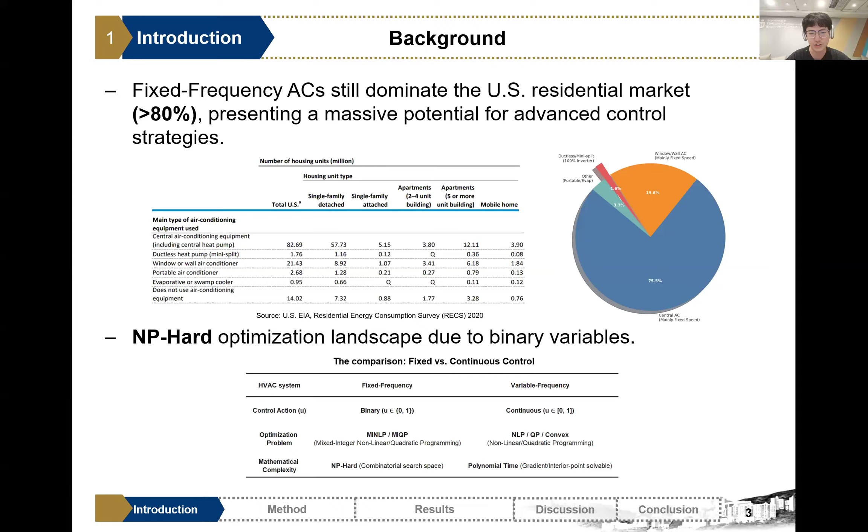But it leads to a problem because if you want to control the fixed frequency AC, that means the control signal must be binary on-off control. So that leads to an NP-hard optimization problem. This leads to the first gap.

Even though mixed integer MPC can be used to improve performance of fixed frequency AC, MIMPC requires high performance equipment to solve complex mixed integer problems. And solving MIP is often computationally prohibitive for low-cost embedded hardware.

So what we want to do is to utilize approximate MPC, using a neural network to imitate the action of the teacher MIMPC without solving MIP.

Even though approximate MPC is good, it still requires some non-negligible memory to store the full model. Most MCUs deployed on residential fixed frequency AC are very resource limited, especially compared with high performance equipment like cloud servers.

So if you want to deploy the AMPC on the MCU, you need hardware-aware algorithms to shrink the size of the model and accelerate the operation speed simultaneously. In this research, we use post-training quantization, quantization-aware training, and pruning to do this.

After model compression, the model's accuracy may be compromised. So in this research, we will explore different compression ratios to identify one that both reduces model size and ensures good control performance. Based on that, here is the overall workflow.

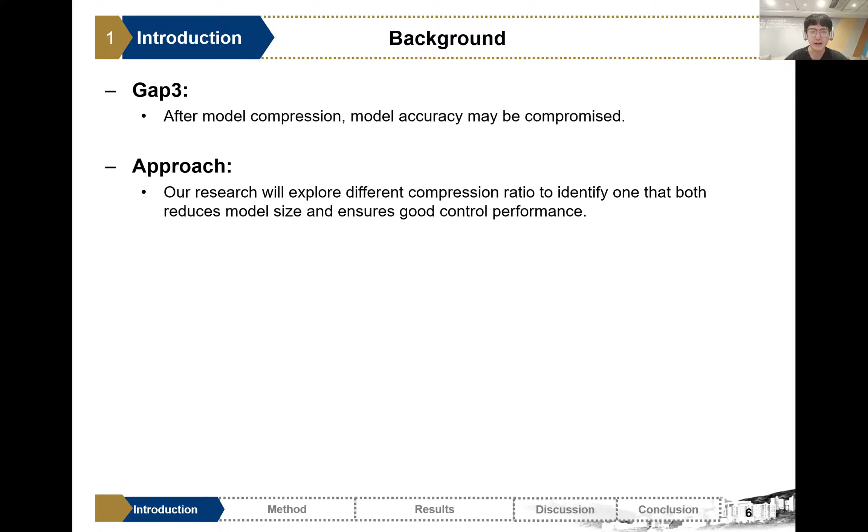At first, we developed a reference MPC, which is a fine-tuned mixed integer MPC. Then we use this MPC to generate some training data set. Then we use this data set to develop some MLPs. Then we use model compression algorithms to compress the several MLPs. Then we find the best one which reaches the best trade-off between control performance and model size, and then deploy it on the hardware.

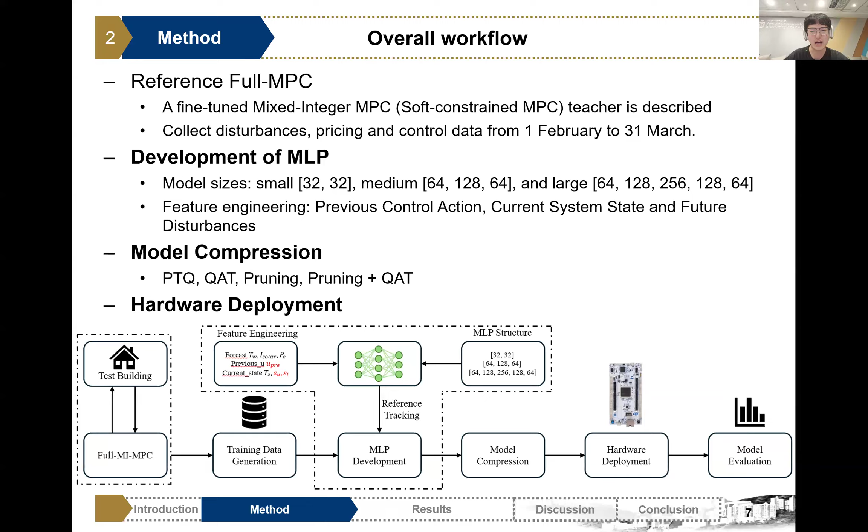So let's start with the system setup and test bed. In this research, I use BOPTEST. Specifically, I use the test case called BOPTEST hydronic heat pump, and I test the teacher MPC and AMPC under the peak heat day and typical heat day.

For the teacher MPC, the thermodynamic model I use is the 1R1C model, and because our target is to control the fixed frequency AC, we need to know the maximum heat pump electrical power and maximum thermal power. For this test case, the maximum power is 3.4 kilowatts, and the thermal power is 10.6 kilowatts.

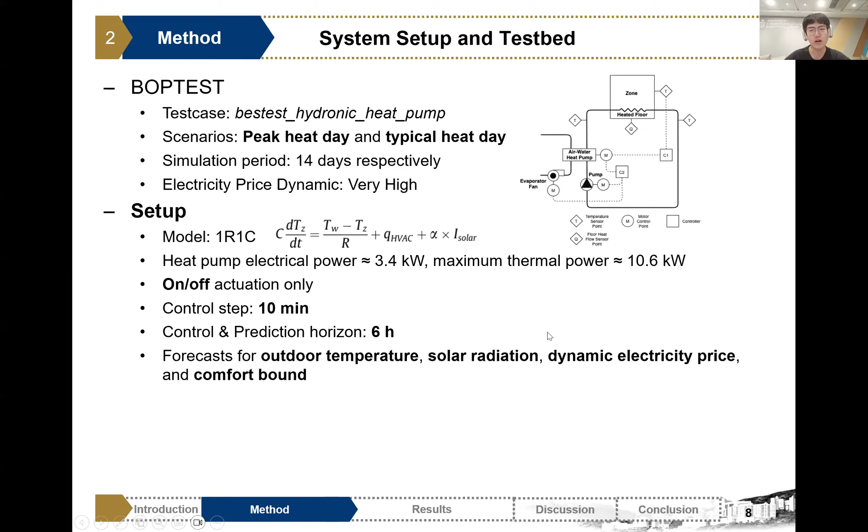Because it is fixed frequency AC, there's only on-off actuation for both AMPC and teacher MPC. The control step is set to 10 minutes, and the control and prediction horizon is set to 6 hours. All of the forecasts here will be sent to both MPCs.

So let me briefly introduce the full MPC. Here we use a soft-constrained MPC. You need to pay attention to the objective function. It includes 3 parts: energy cost, thermal discomfort, and times of switching on off. The first 2 terms is easy to understand, but why we set the third term?

Because the high frequency on-off behavior may be harmful to the equipment and occupant comfort. And then these are the constraints.

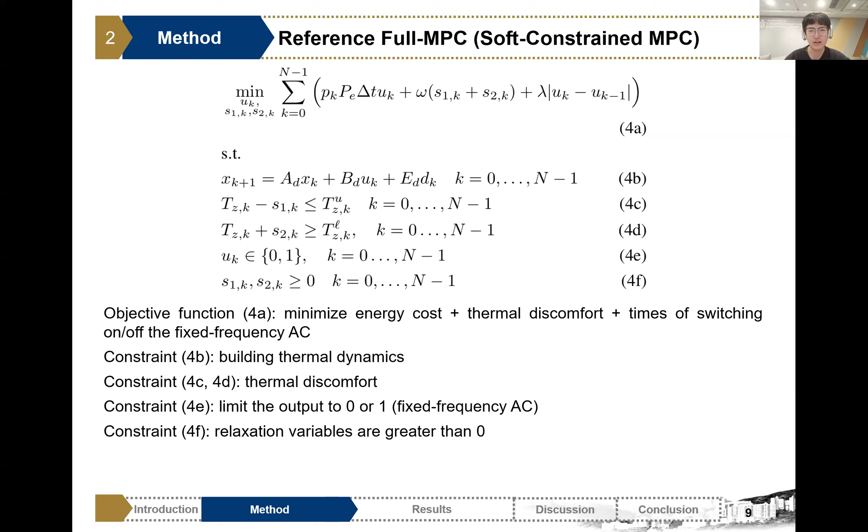So we use this MPC to generate a training data set and use the training data set to train these 3 sizes of MLP. The first small one includes 2 layers, the medium includes 3 layers, and the larger one includes 5 layers. And for the hidden layer, we use ReLU, and we use sigmoid for the output layer.

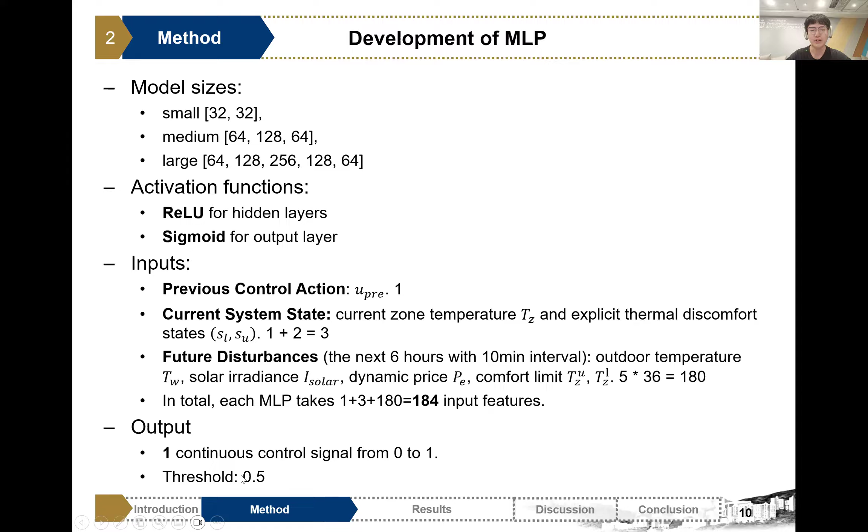Here, all of the input features can be divided into 3 parts. First, the previous control action. The second part, current system state, and the third part, future disturbances. So altogether, 184 features will be input to each MLP. All of the features will be processed by the MLP and then get 1 continuous control signal from 0 to 1. This continuous control signal will be converted by a threshold into a binary control signal.

And then before I introduce why the compression algorithm is very useful and efficient, let me briefly introduce the data type.

In machine learning models, almost all of the weights and bias are stored in FP32. That means 4 bytes. If you want to store 1 number, 4 bytes are required. So if we can convert the FP32 number into an int8 number, the storage size will decrease a lot, because only 1 byte is required to store 1 int8 number. So that's how the quantization algorithm works.

So at first, we use the simplest quantization algorithm, which is called post-training quantization, or PTQ. Here, the diagram shows how post-training quantization works. It's the simplest one, but it just simply maps the FP32 number into the low precision number. So you can imagine the control performance will degrade a lot.

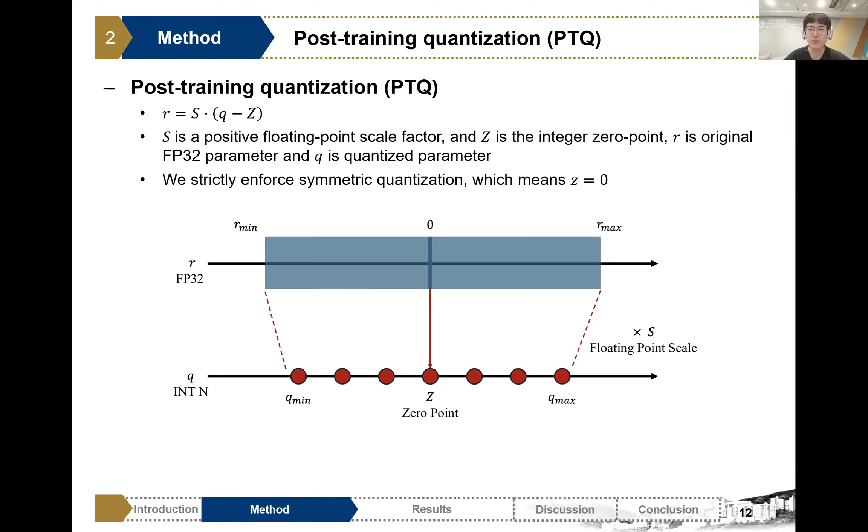So to address that, we also tried quantization aware training, or QAT. This algorithm lets the MLP adapt to the quantization noise during an additional training process. So the control performance will improve a lot compared to post-training quantization. But you can see here there is an additional, complex training process.

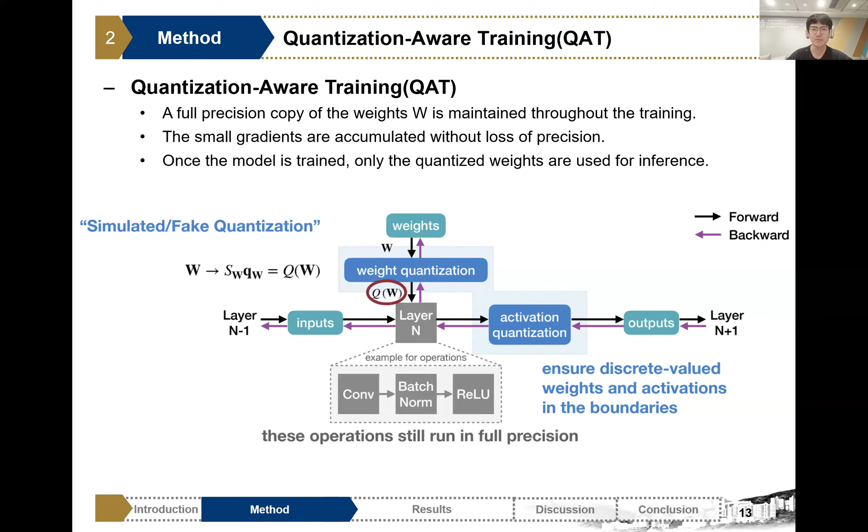If you want to use the pruning algorithm, the pruning granularity, criteria, and ratio need to be set. First, we use neuron level pruning, which means you need to remove the neuron and all input and output weights connected to it. The criteria in this research: we assume weights with larger absolute values are more important than other weights. Third, the pruning ratio, which means the proportion of neurons that are eliminated.

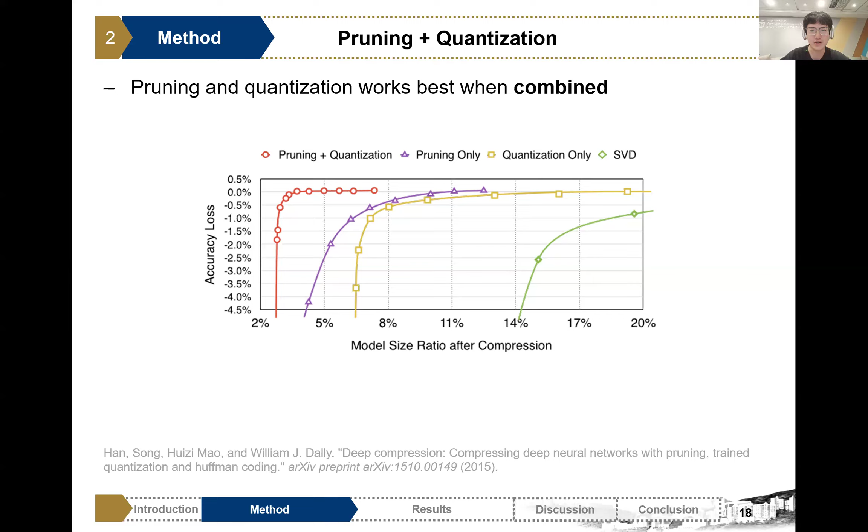Because in the research we want to find which compression ratio shows the best trade-off, we tested it from 10% to 90%. After the pruning, additional fine-tuning is required to improve the performance of the model. Some research finds that if you combine pruning with quantization, the model's performance will be better. So here we also combine pruning with quantization.

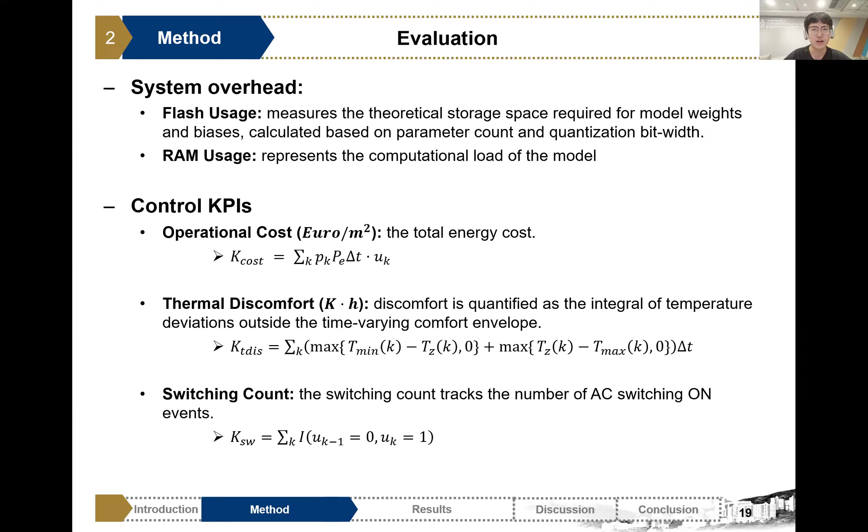So for the system, if you want to push one control step, first the BOPTEST will send the forecast and current state through the serial port to the STM32 controller. Then the AMPC deployed on this controller will process the information, get one control signal, and send it back to the PC. So you can imagine the STM32 is just like a real-world thermostat, and the BOPTEST pretends to be a virtual AC.

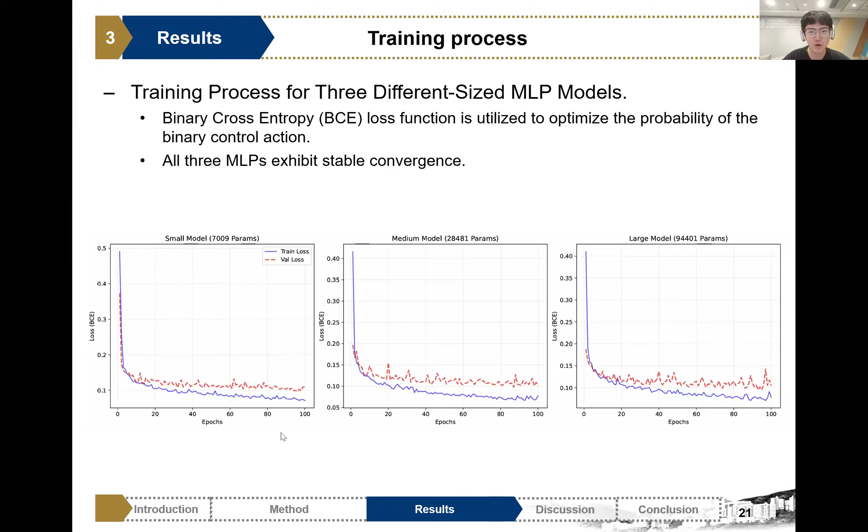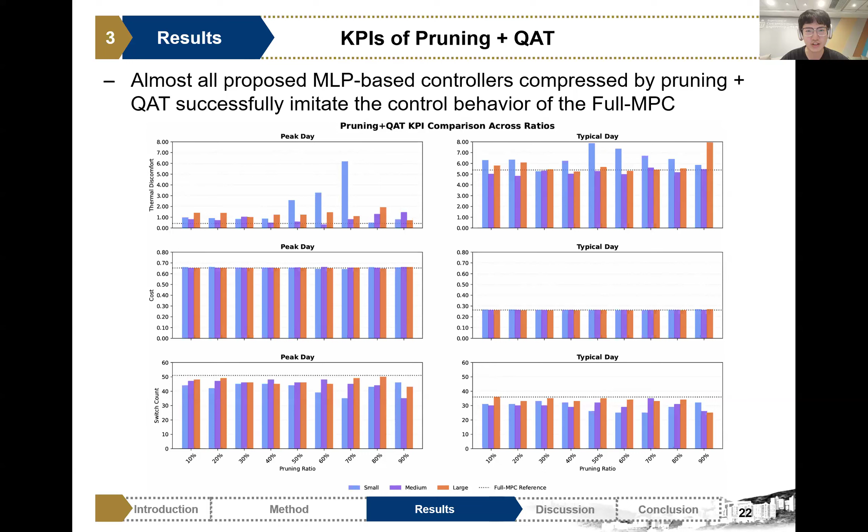Here we use binary cross entropy to train the 3 models, and you can see after 100 epochs the model exhibits stable convergence. Because I mentioned before that if quantization works with pruning, maybe it can work best, I paid more attention to it. You can see this diagram shows almost all of the MLP successfully imitated the control behavior of the full MPC, and this diagram also shows that.

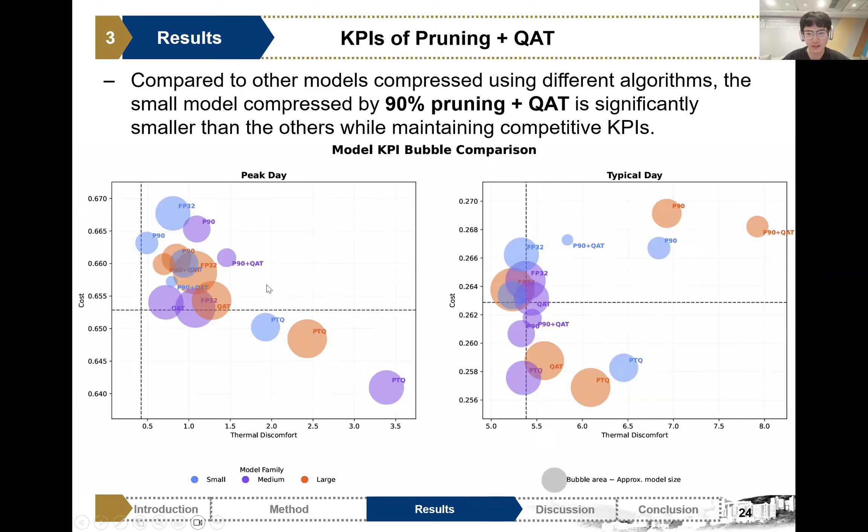For the system overhead, if you only calculate the model, the flash and RAM usage is less than 1 kilobyte, which is very small. If you calculate the whole firmware, it's also very small. In contrast, if you want to run the full MPC, the RAM usage is much larger than the small MLP, and it's impossible to deploy on the STM32.

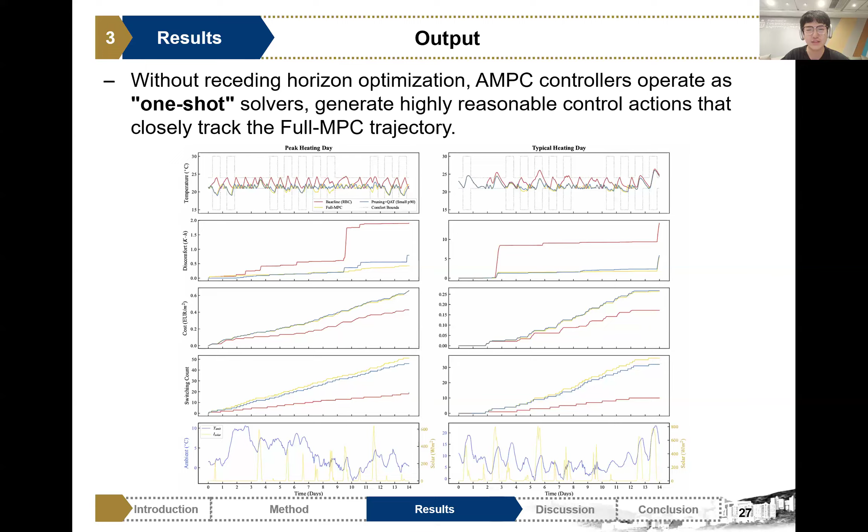But you must notice that the AMPC controller operates as a one-shot solver. It is running without receding horizon optimization. Of course, our research has some limitations because we only tested it under a single zone.

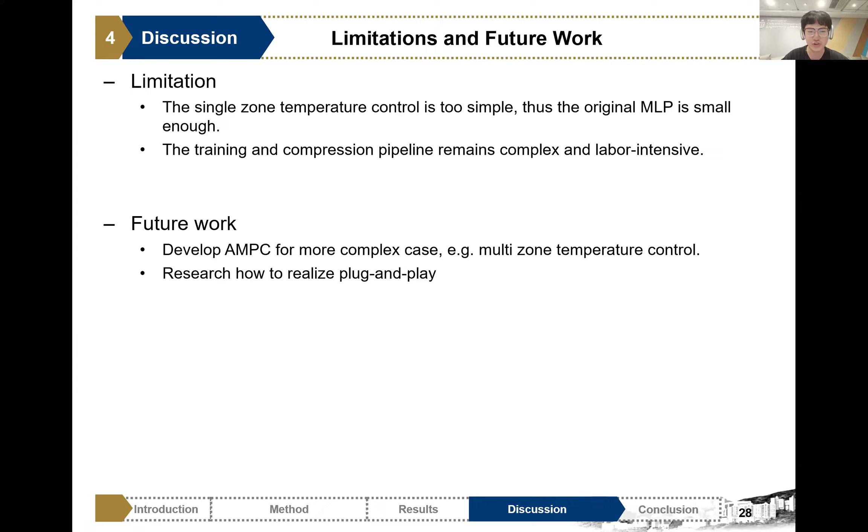Thus, the original MLP is small enough, but the training compression pipeline remains complex and labor intensive. So in my future work, I will develop AMPC for more complex cases, for example multi-zone temperature control, and research how to realize plug and play.

In conclusion, this study presents an AMPC by distilling the complex mixed-integer MPC formulation into a compact MLP and applying model compression. We successfully address the computation bottlenecks. In summary, the two-layer MLP with 90% pruning plus QAT emerges as the optimal solution.

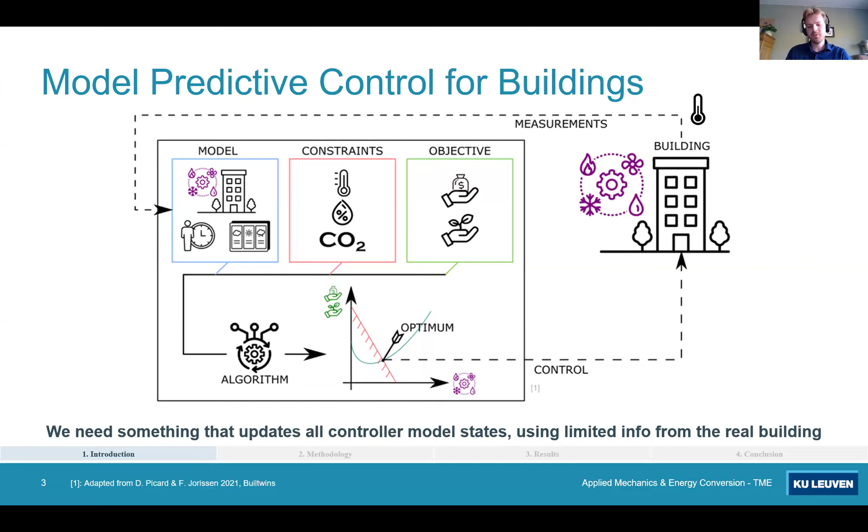And that's where a state estimator comes in. What a state estimator basically does is, given limited information from the real building, it updates all the states of the control model while also taking into account the model mismatch between your controller model and your real building.

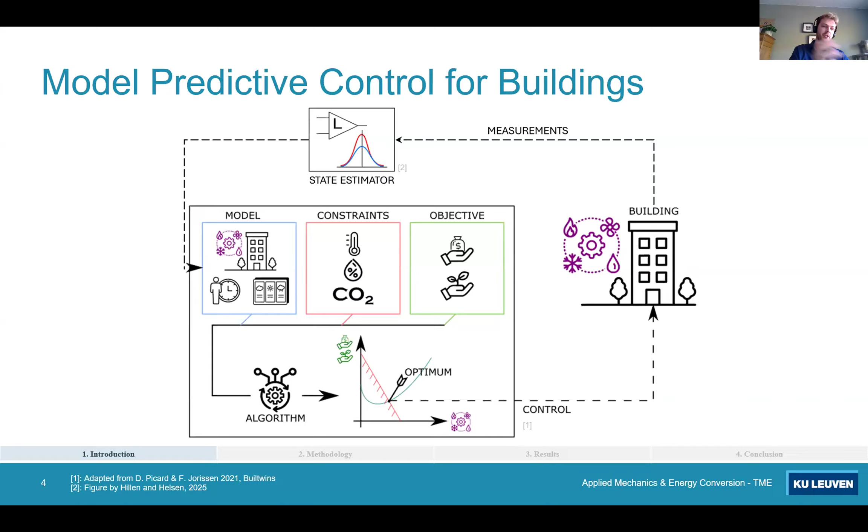Now, you can make a lot of different controller model types. On the one hand, you can go for a full white box or physics-based approach, where you really take into account all the physics and heat transfer phenomena of your heating system, but also your building envelope. On the other side of the spectrum, you can go to the black box approach, where you basically try to correlate inputs and outputs with each other using a generic structure like a neural network.

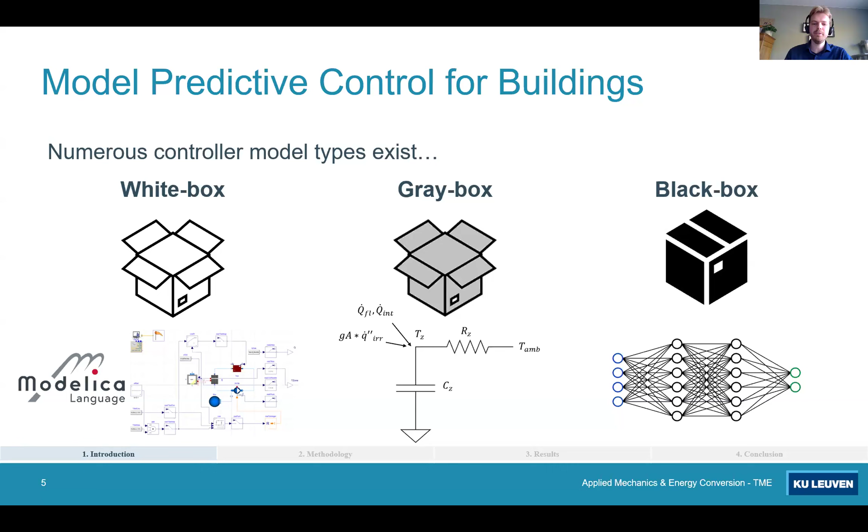Or you can do a hybrid approach, which is the gray box approach, where you start from limited physical equations and enrich them with data. In buildings, these gray box models usually have the form of an RC model.

Those are controller models. On the other hand, you also have a lot of state estimators that you can use. A state estimator basically determines the point where you start your next MPC iteration from. So it's both the controller model and the state estimator that will really determine the performance of the whole MPC.

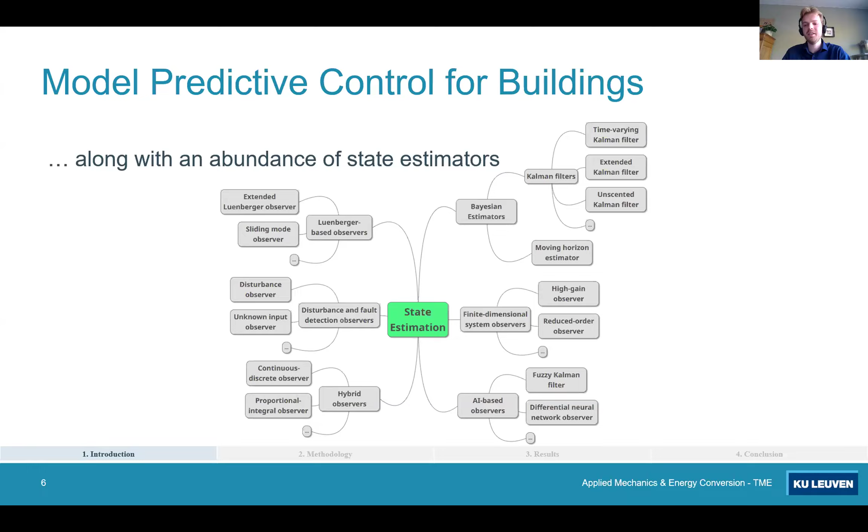With a lot of different types of controller models and state estimators, it's not always clear which combination, or which prerequisites these models and state estimators must have, to lead to efficient MPC, because you would only know that after you implement a specific combination in a real building and observe how it behaves.

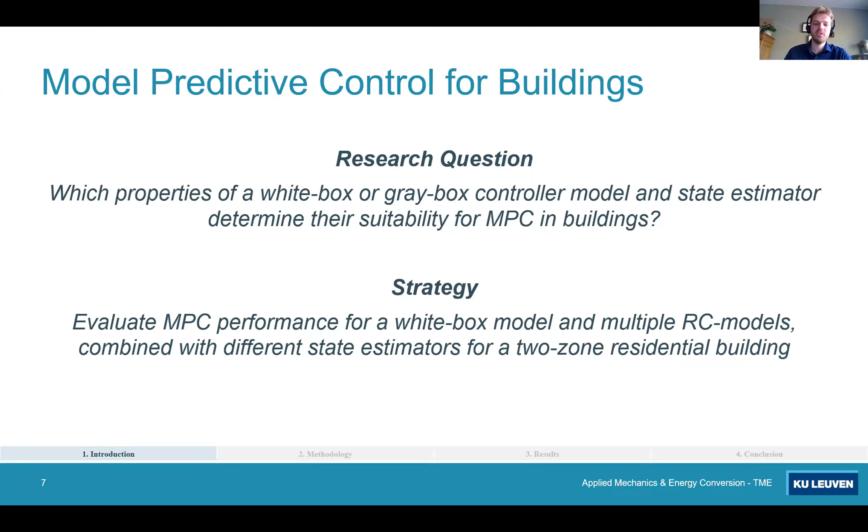And that leads me to the research question I'm trying to answer today. I'm investigating this purely for white box and gray box controller models. How will I do this? I've evaluated and compared the MPC performance for a white box model and multiple RC models, so gray box models, all combined with different state estimators, for a two-zone residential building case from BOPTEST, obviously.

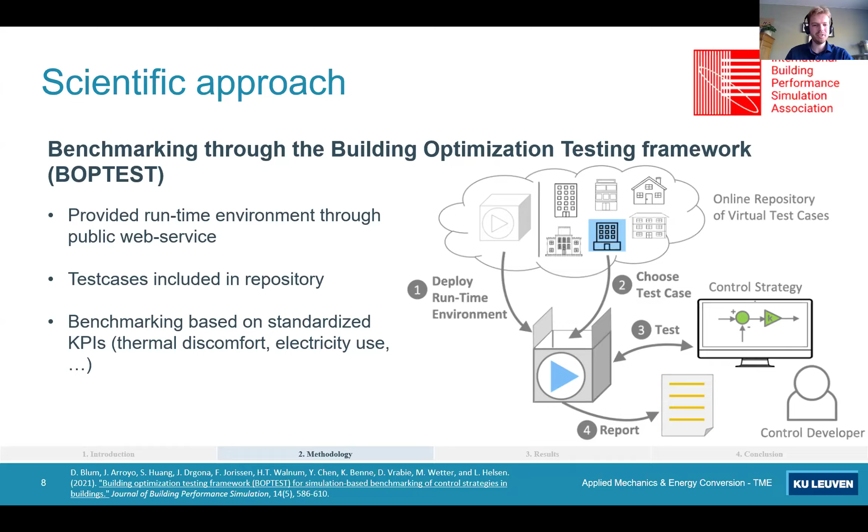And this is where BOPTEST comes in. If we want to compare all these MPCs with different models, etc., then we need to do so based on the same boundary conditions. I don't have to explain what BOPTEST is exactly, but I think you can also see the value in this framework for this research.

As I said at the beginning of the presentation, I used the two-zone apartment use case. Before this work, I also applied the same methodology to the BOPTEST hydronic heat pump use case, which is a single zone. This is a step up because these interzonal effects are more difficult to model, so that might cause some strain on the control models.

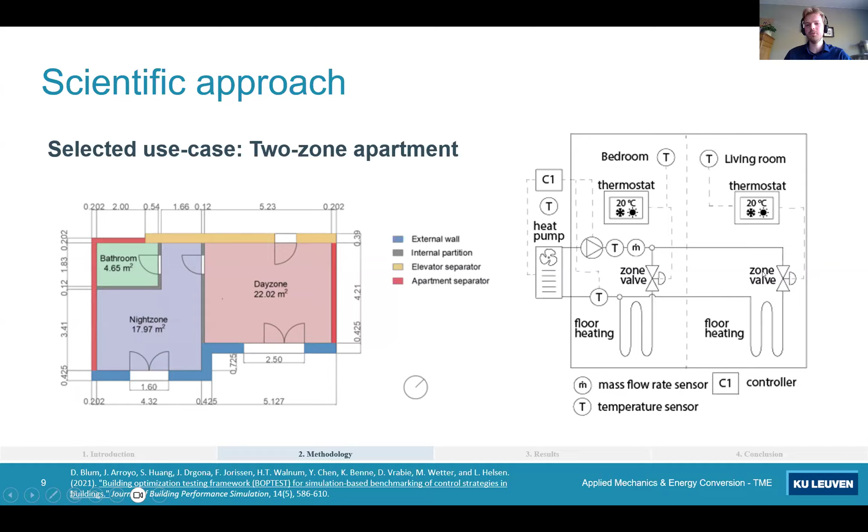Let's start with the gray box approach. I already talked about RC models. What are they basically? They're simplified lumped capacity models that start from simpler heating dynamics of buildings.

For example, in a regular building, through the windows you have some solar radiation coming inside. You have your resistance to the outside, due to heat conduction through the walls. And the room that you're sitting in has a certain capacity, because it will not instantaneously fluctuate very largely.

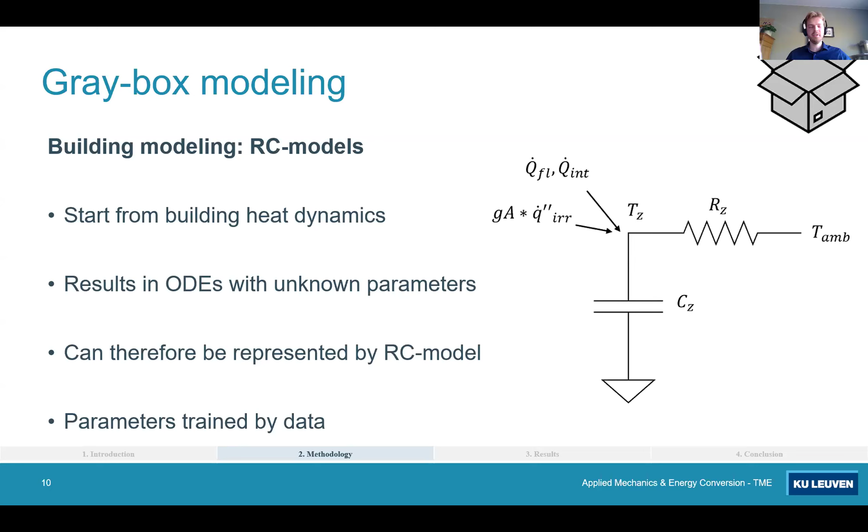So we can express that in the form of a differential equation and then basically show that as an RC model. Now the C and R values, as well as the GA value in this case, are trained with data because they are lumping a lot of different heat transfer phenomena together.

So the types of RC models that we looked at, in this case for only one zone, are a first order, second order, and third order model. First order basically lumps every thermal mass into one capacitance and one resistance to the outside.

The second order model adds a second state for the floor temperature, because we have a floor heating loop. So then basically we're distinguishing between the time constants of the heat transfer due to the floor heating and the time constant of the zone.

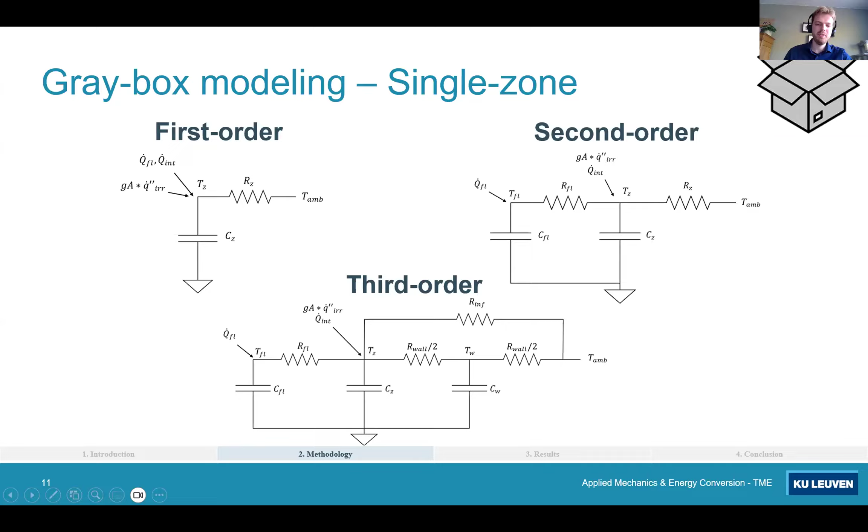It becomes already quite large. We basically connect it by adding a resistance between the two zone temperatures of both the day and night zone.

Now, how will we actually estimate these parameters? Because if you only have two data sets here, trying to estimate a lot of these parameters can become tricky for higher order models.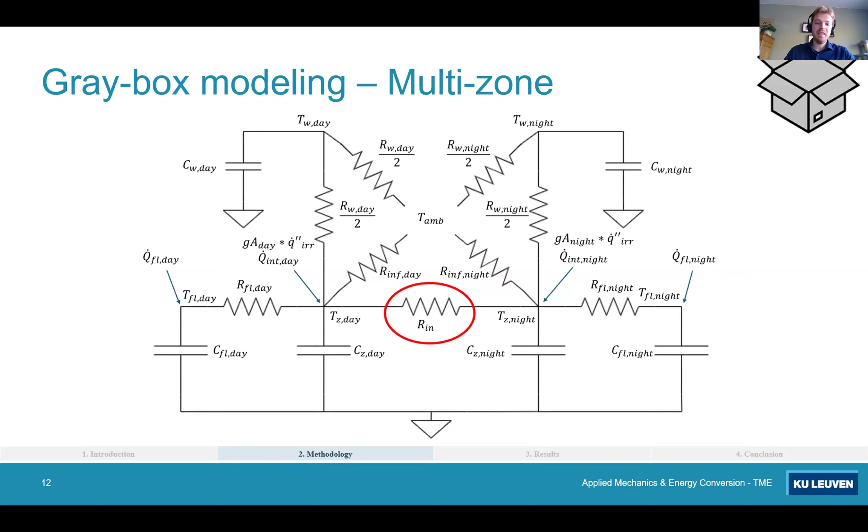And how will we do this mathematically? We can use the widely used least squares approximation, which basically minimizes the squared errors between measured and predicted temperatures.

But we expect that mainly for lower order models, this formulation averages out dynamics that the model cannot explicitly take into account. And this is why we proposed a new least derivative squares formulation, where you also add another loss term specifically on the first derivative. We think that this introduces an important bias such that the dynamics of these models are captured much better.

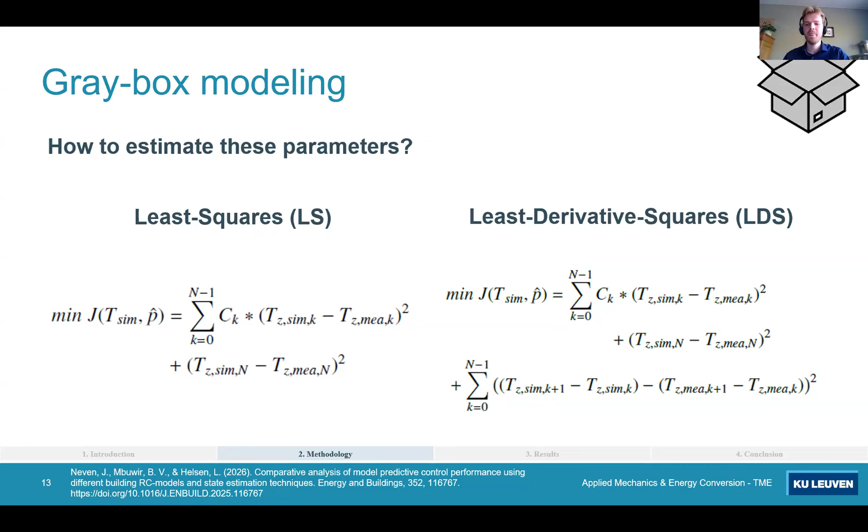But I'm getting ahead of myself. I'll show that later.

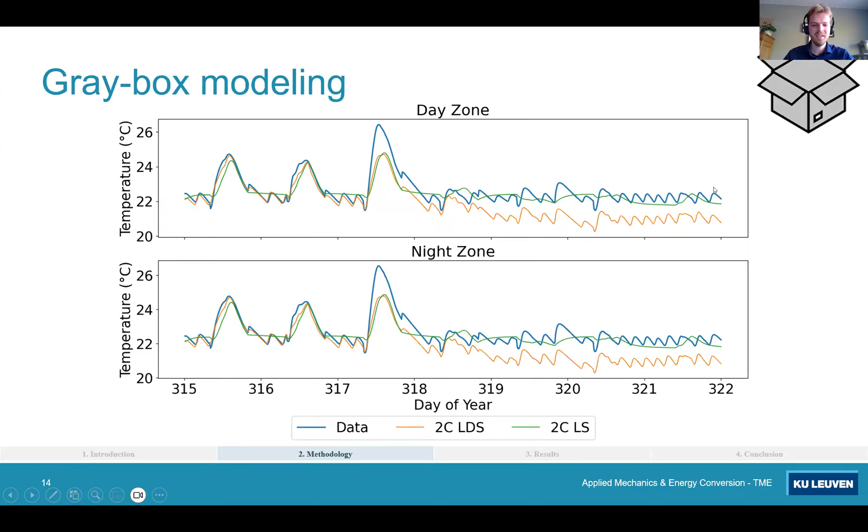And of course, we're not trying to minimize the thermal energy use exactly, but rather the electricity use of the heat pump. So we made some additional bits to relate the control inputs that get fed into BOPTEST with the thermal power that we're minimizing in the MPC. This is just to connect the necessary control actions with the things that we optimize in the RC model.

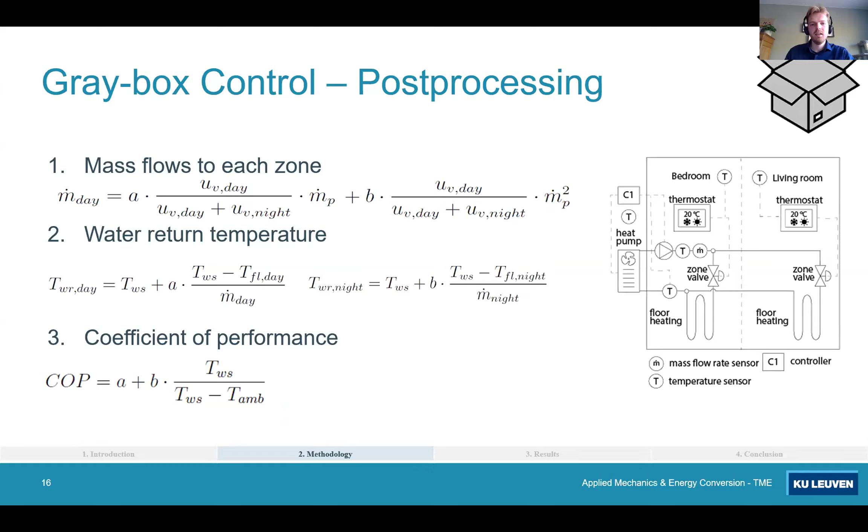So that was it for gray box. Now for white box, that's a whole other approach because we don't use the data that we emulate from BOPTEST. Rather, we use the technical information from the building envelope and from the HVAC system to construct a Modelica model, or Modelica optimization model, purely from the ground up.

And this optimization model should then be compatible with the tool TACO that we use. I won't discuss TACO in much detail here, but I'd happily refer you to the TACO paper, of which I can give you the DOI. What TACO basically does is, as long as you have a twice differentiable controller model, it automatically translates that model into optimization code where it splits linear and nonlinear dynamics. That operation has a lot of benefits for computation time while still preserving model accuracy.

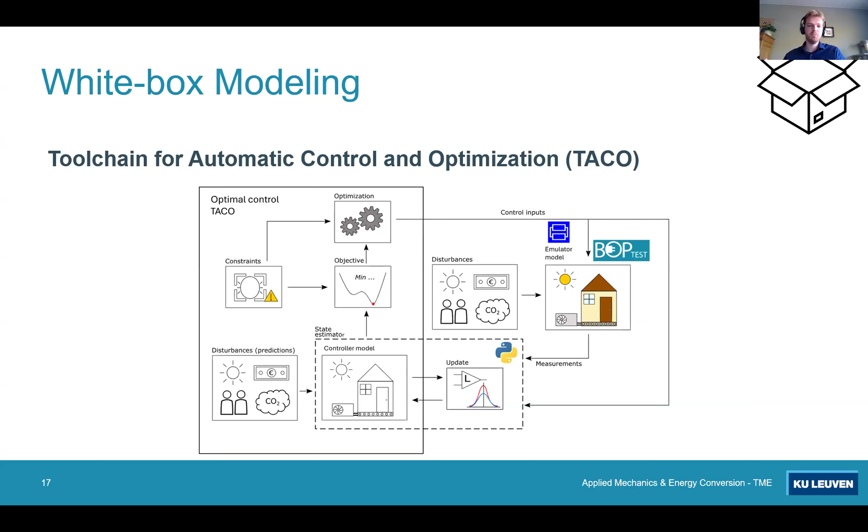And for the white box approach, because we really take the building envelope and HVAC system together, we can directly minimize the electric power of the heat pump. For the rest, the MPC optimization is all the same as the gray box approach.

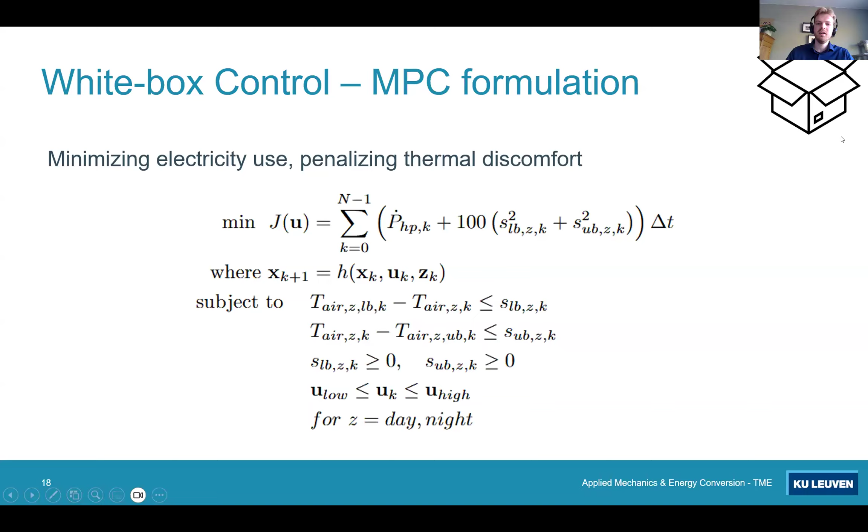Regarding state estimation, that's the second major part, basically. We looked at two different state estimators. The first one is a stationary Kalman filter.

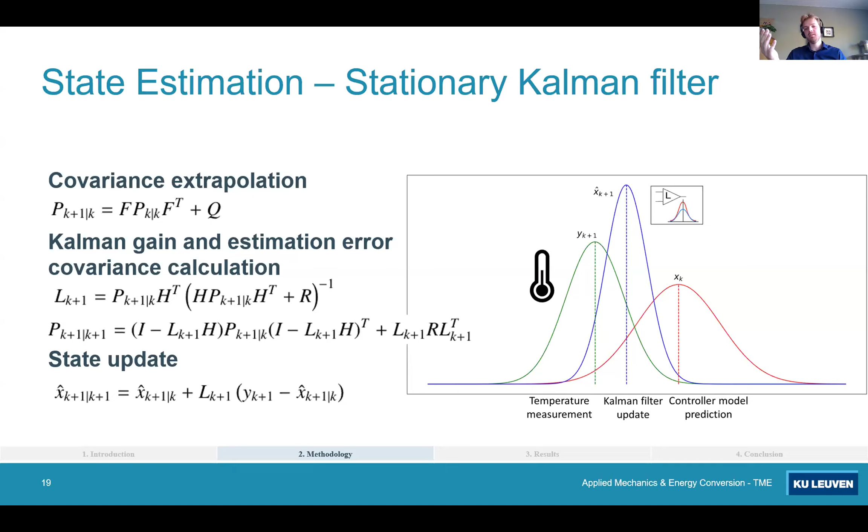And here I show you the more general equations of the time-varying Kalman filter. But basically, what a Kalman filter does is it updates all the states with only information from the measured ones, with a Kalman gain L. That Kalman gain L is basically calculated by a trade-off between how accurate your model prediction is versus how accurate your measurement is.

Alternatively, we also developed a moving horizon estimation algorithm. That's basically a whole other type of state estimator, because instead of working with matrices, you perform an optimization problem based on past measurements. So you're inferring a time series with your model dynamics based on a series of past measurements. And if you minimize the squared error between those, you can estimate all the controller model states at the time step needed, while also enforcing the same constraints as the MPC does.

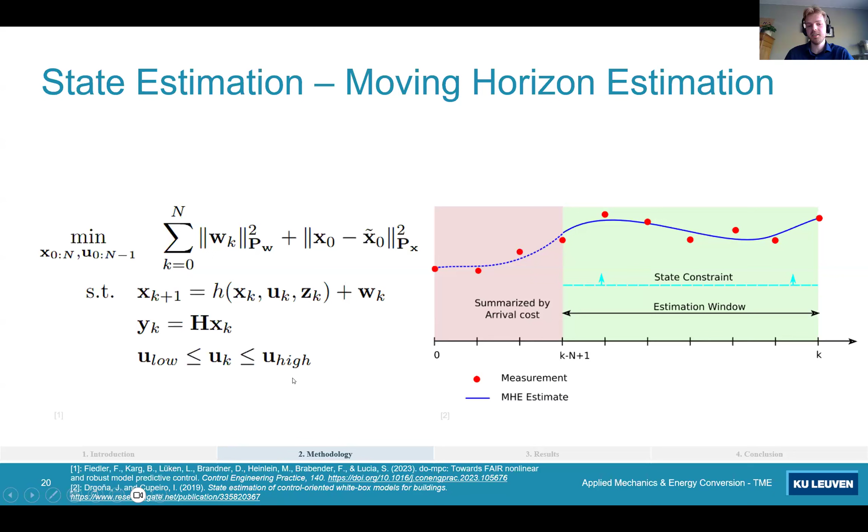How will we validate our models?

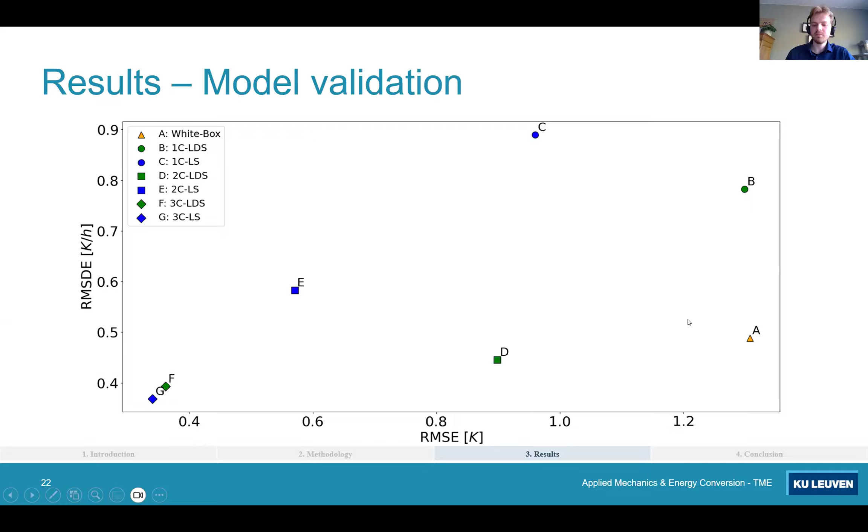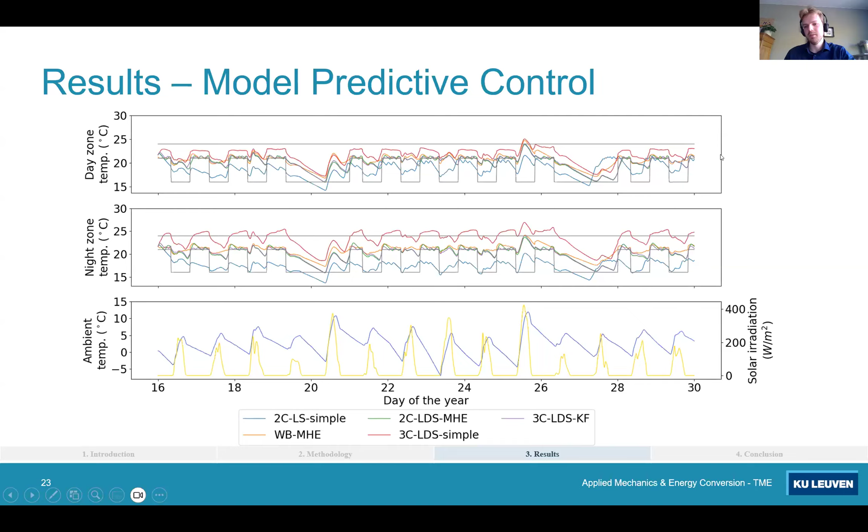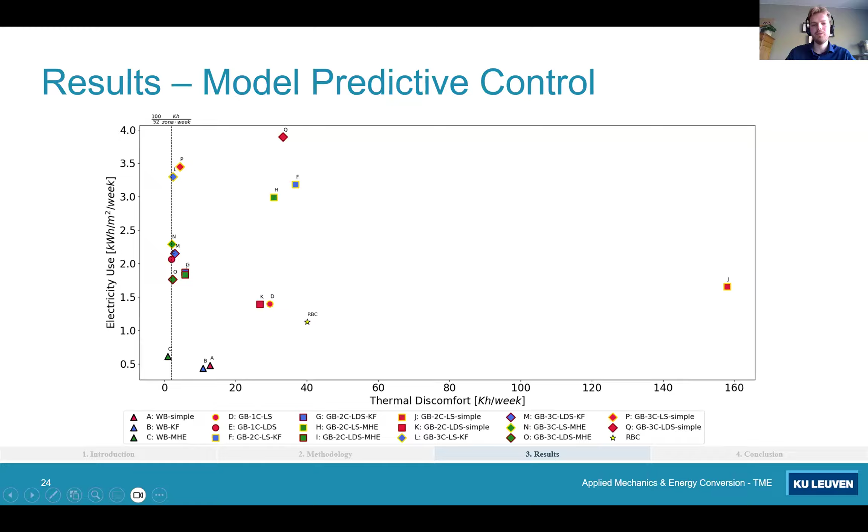Firstly, let me clarify which points are what. The three upward pointing triangles are all the white box MPCs. The green interior is a moving horizon estimator, blue interior is a Kalman filter, and red interior doesn't use any state estimator. The other shapes are increasing orders of RC models.

The first thing we can see is that both approaches can lead to a decent MPC formulation if they use a proper state estimator. The white box approach performs the best in this case, mainly when using the moving horizon estimator, but also the gray box approach here. If you compare it to the baseline rule-based controller, the thermal discomfort is reduced drastically.

The white box approach does outperform the gray box approach tremendously in terms of energy use. We think this is due to the controllability of the use case, and because the white box approach can really capture the HVAC system and the building envelope in one model. Regarding the state estimators, a moving horizon estimator seems to outperform the Kalman filter for both approaches in this use case.

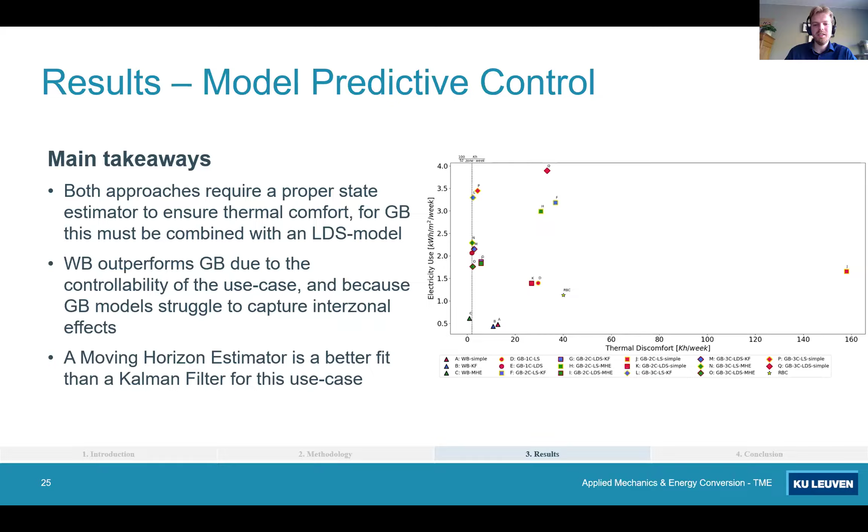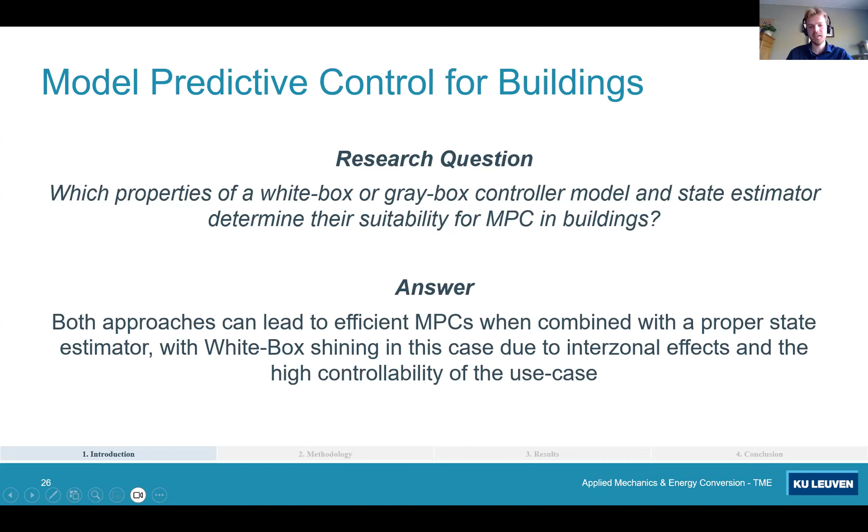So that's what I wanted to show in this presentation. We can now answer the research question above: both approaches can lead to efficient MPCs when combined with a proper state estimator, and white box outperforms gray box in this case because of the controllability of the use case and its ability to model everything at once. Thank you for your attention, and happy to answer any questions later in this webinar.